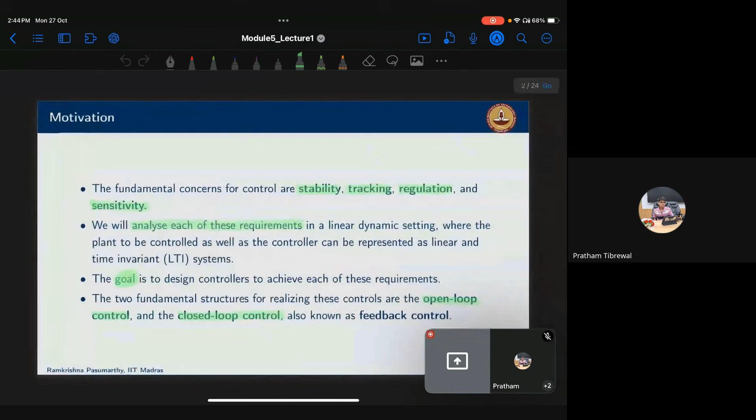Basically, control systems - these are, for any control engineer, the major concepts or major aims: stability, tracking, regulation, and sensitivity. So particularly any control problem will be connected to all these four aspects.

Particularly, the aim of any control problem is to make the system stable, to have the tracking and regulation. So if you see that problem, it could be a regulation problem or a tracking problem at the outset. So what we do in this lecture is first we will see what these four problems are with respect to open loop and closed loop systems, and we'll try to see, by considering an example, what exactly these four things are.

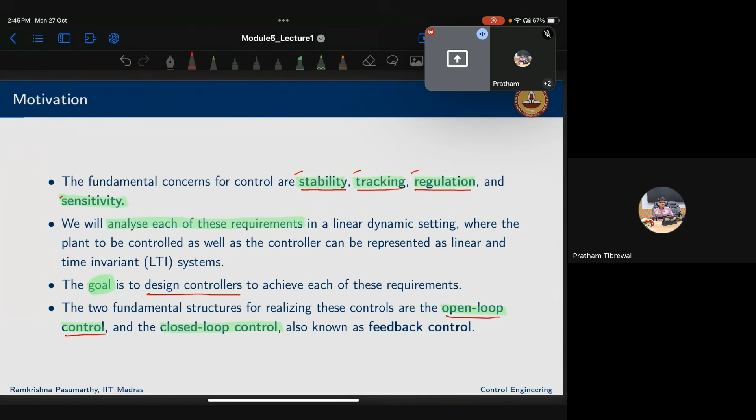Then we will analyze the systems and get into the concepts of designing the controllers to achieve these four tasks. So what we will do is first we will start at the basic level with the open loop system or open loop control. Then we will see what these four concepts are with respect to this open loop control.

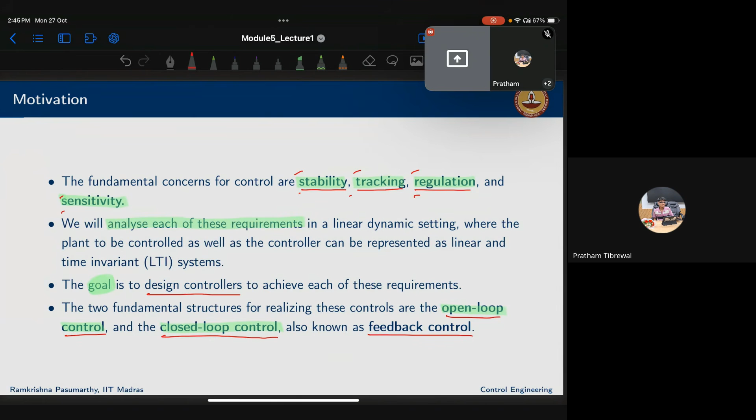Then we'll continue our discussion with the closed loop or feedback control, so that we'll have a simple clarity on what happens when we shift from open loop to closed loop. As you know, open loop means we don't have any feedback.

So open loop will have the reference signal, then actual output, then we have our system here, and this is the controller. There will be no closed signal from output back to the input. So here basically what this controller does is it modifies this reference signal.

So what we do is we give this reference signal to the controller, and the controller modifies the reference signal. Then after that, it will apply that signal to the system or plant - this is also called the plant. So what this controller basically does is it takes the reference input and sometimes it may cancel the unwanted dynamics of the plant and try to replace them with the desirable dynamics.

You can have various examples like washing machines, traffic lights, etc. So the aim of this controller is it takes the reference signal, modifies it, and gives that as the input to the plant.

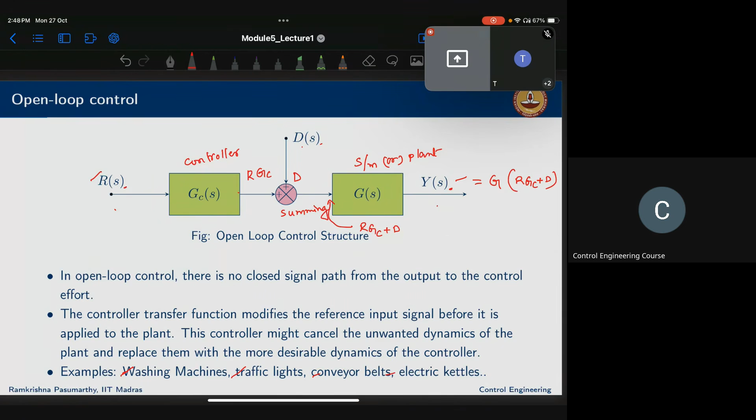That will be multiplied with G, so it will be G multiplied by RGC plus D - that is the open loop output. Once you have that, the signal you wanted to get at output relative to reference input is R. So obviously the error is going to be R minus Y.

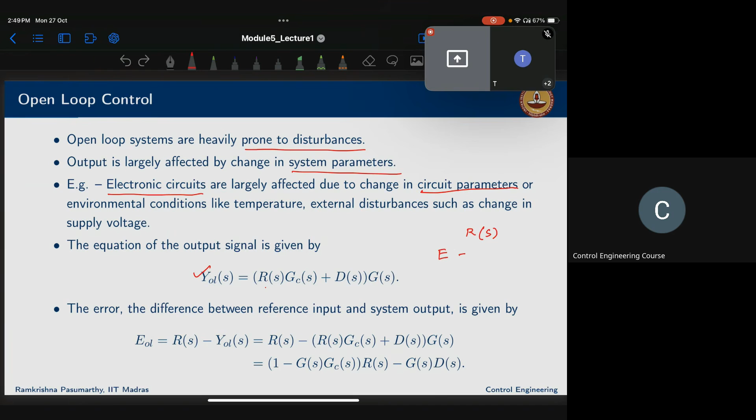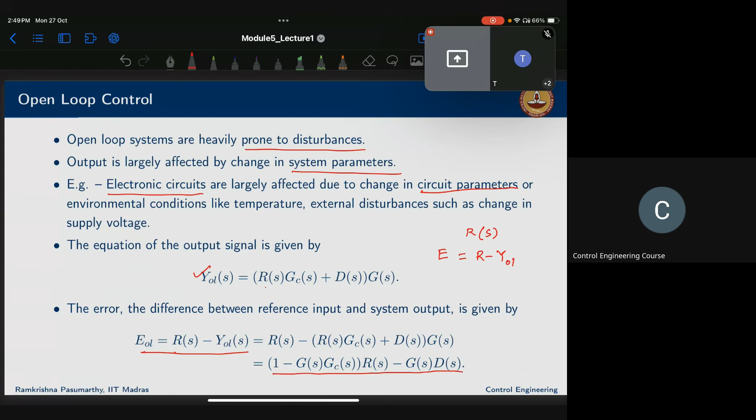So R minus reference minus output of the open loop system. Once you take that, this is the expression of the error for the open loop system with the disturbance. So we are starting with those four concepts.

Let's see this example. This is the example of a thermal control system where we have this system transfer function, the transfer function from heater to the output temperature.

Here our goal is to track the reference input, R of t, which is a ramp with a slope of 30 degrees per second that will go for a duration of 30 seconds, and at steady state we should get a value of 300 degrees Celsius.

Now we wanted to design this open loop control in such a way that we wanted to reach this one, to track this reference signal R of t.

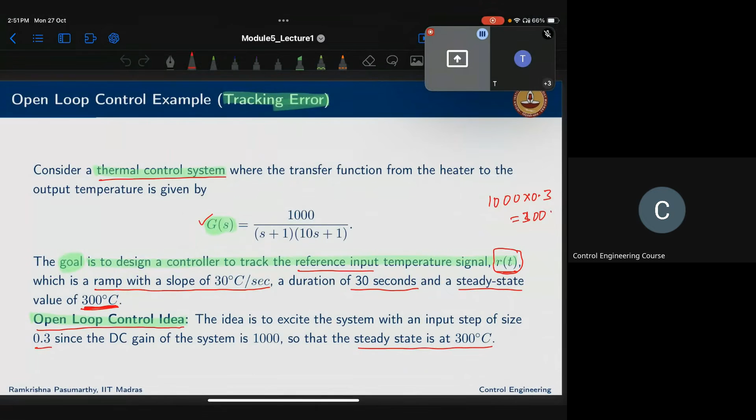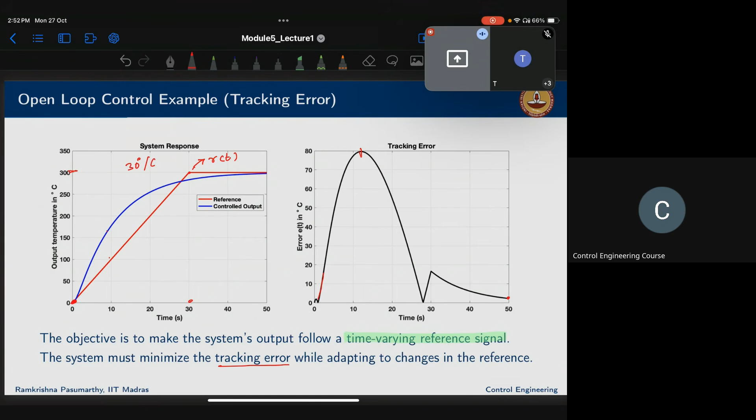So that is the tracking error. Now regulation. Basically regulation is defined as your actual output of the system, y of t, to follow a specific value. It means it will be something like you have t, you have y of t.

So this value, let's say this is some kind of 1. Your y of t has to follow or has to reach this reference value, that is called regulation. Regulation is the ability of the system to maintain a constant output value despite external disturbances.

So the problem of regulation is to keep the error between these two very small, when the reference is at most a constant set point and disturbances are present. You want to minimize that error. When you consider the open loop system, the controller will have no influence on either the disturbances or the noise, because the controller cannot affect these noise or disturbances. So the open loop control system is not suitable for the regulation of this particular thermal system.

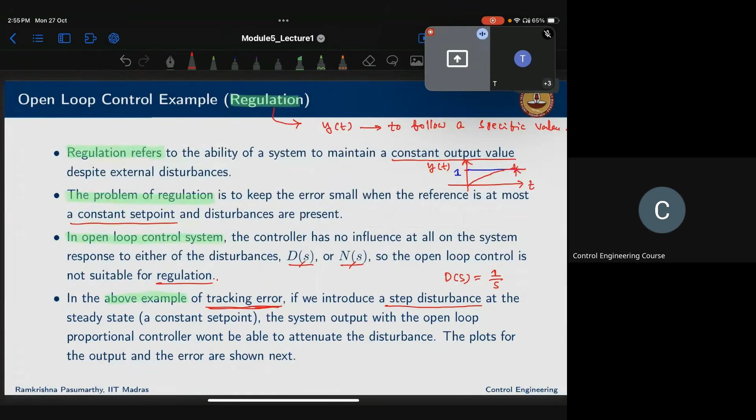If you see this above example of the tracking error, if you consider a disturbance of step in nature, that is D of s equals 1 by s, the system output with the open loop proportional controller won't be able to attenuate that disturbance. So this tracking error would still exist at all points. You cannot make that one go to 0 because the controller will not affect the disturbances. That same thing you can see here, for taking D of s as 1 by s.

When you take D of S as 1 by S, you can see the error with no disturbances, this black one, and with the disturbance of 1 by S, this one. So you're getting the error here 0, here is 50. In the temperature values also here you can see, this is the 300 temperature you wanted to reach when you have no disturbance. That is reaching exactly, but when you have the disturbance, you have this error at the steady state. Basically regulation means to reach this 300 value, whereas this open loop controller will have no control over the disturbance, so we are getting this error at the end.

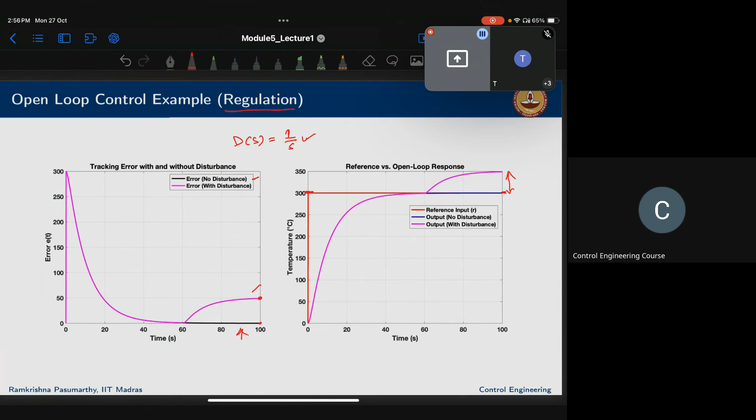So next is, out of all those four, we have seen the tracking error, we have seen the regulation, and next is stability. In the previous modules, week 3 or week 4, we have seen what is called stability. Stability is defined as all poles of the transfer function must lie in the left of the S plane. It means, if you consider this is the real part of S and this is imaginary part of S, if you find the poles of a transfer function, all poles must exist in the left of the S plane. This is LHP, this is RHP.

So how can you define the poles if you consider a transfer function, G of S, where it has the numerator as well as the denominator? If you take the characteristic equation, that is D of S equal to 0, that is denominator equal to 0, and then find the roots of this, these are called poles. These poles must lie in the left of the S plane. If all poles exist on the left side, we say that system is stable. Even if one pole is existing on the right side, we say that system is unstable.

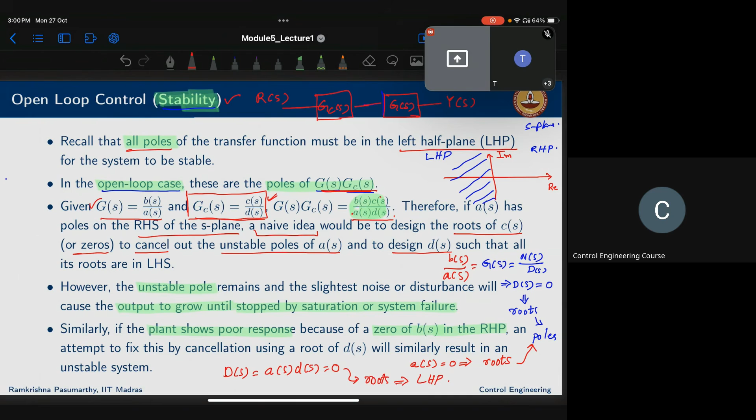But here the issue is that even with pole cancellation, the unstable pole remains, and the slightest noise and disturbance will cause the output to grow until stopped by saturation or system failure. Even if you go for the cancellation of the pole, the unstable pole still would remain, and if there is a slight change in the noise or disturbance, they will make the system response grow without any bounds until it goes to saturation or system failure.

That's the disadvantage. Similarly, if the plant shows a poor response because of the zero of B(s), if any root of B(s) is on the RHP, and you try to fix this B(s) behavior by properly choosing D(s), just like the opposite case of A(s) and C(s), now we are trying to see B(s) and D(s). This will also make the system unstable. Why? Because you're not changing the system behavior, you're just cancelling out the poles and zeros behavior. That makes the system still unstable.

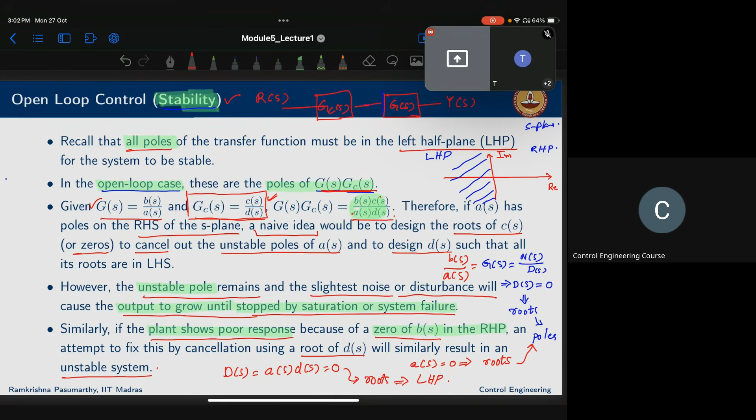So that is about stability. Next, sensitivity. We have seen tracking error, regulation, stability, and now sensitivity. Let us say our plant has a gain of G at a particular frequency, but when it is in actual operation, the gain may perturb. The gain may alter by plus or minus delta G. We can call the fractional change as delta G by capital G. So we already know the open loop gain, because the plant G and controller GC are connected in this way, with Y and R.

So the overall transfer function L is nothing but G multiplied by GC. Now, if you consider the perturbed system, this loop gain changes, so you add this change in L(s). You have the L(s) expression, and you add delta L(s) to get this final expression. From here you can find delta L(s) as delta G(s) GC(s).

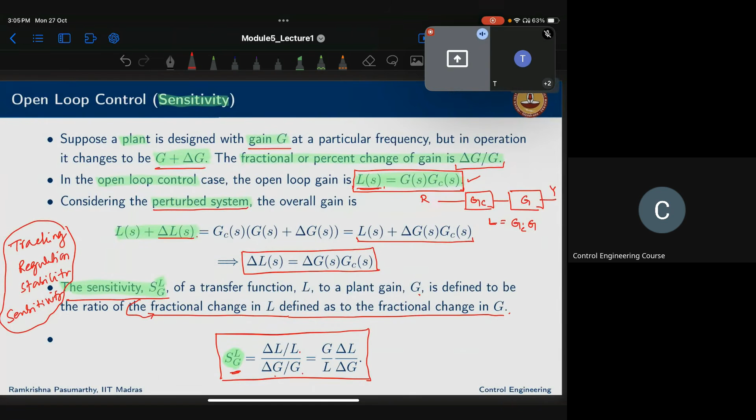Now let us consider this closed loop structure, where for the open loop structure we are adding this feedback path along with noise. Previously we had this structure, and now we are adding the noise as well as this feedback. To the open loop we are adding this feedback by using this sensor block, and also adding noise. Basically, what this feedback control does is use a sensor here which measures the output, and that output will be fed back to this summing point to compare with the reference signal.

Now you could see we have 3 kinds of inputs: R(s), D(s), and N(s). Using the superposition theorem — what does superposition theorem say? It says that when you have multiple input sources, the response of a system is the summation of the responses when all those sources are acting independently.

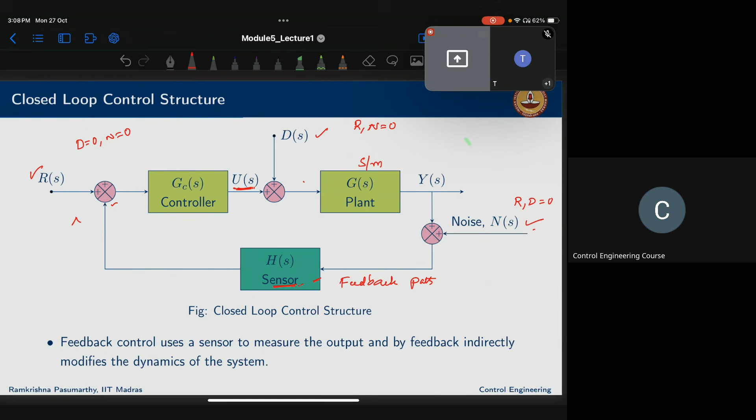Okay, the control input which you apply here, that also in the same way. So the control input due to R of s, control input due to D of s, control input due to N of s. So using the superposition theorem, the total control input is the input due to individual inputs.

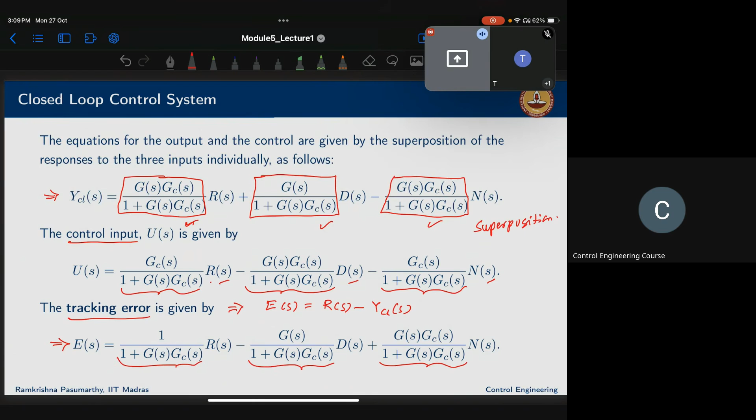Okay, now tracking error is nothing but, again in the same way, E of s is nothing but R of s minus YCL of s. Okay, for the closed loop system, you will get that expression for E of s as tracking error, these expressions multiplied by their inputs. I hope this is clear. So we got this E of s.

Now getting into the same kind of analysis: tracking error, stability, regulation, and sensitivity. So first start with the tracking error. First assume that N of s and D of s are zeros. Then the E of s expression becomes such that the second and third terms go to 0. We have only the first term.

So the tracking error, if you consider delta G of s for this tracking error, that is the change in the open loop transfer function, we can find E of s as delta E of s by including the delta term for this particular term.

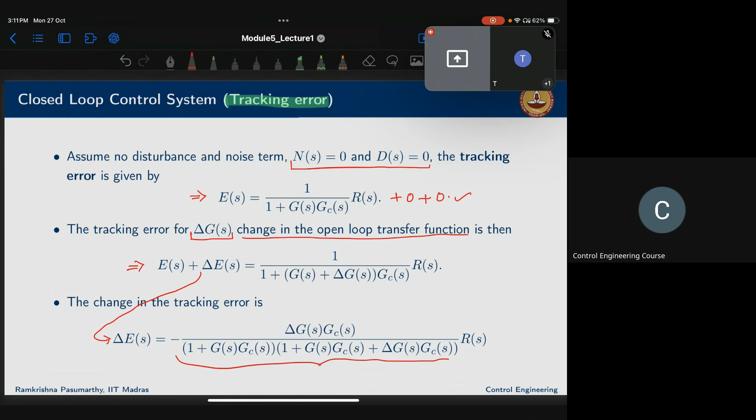Now the change in the tracking error we can find after substitution, this term, by adding into the E of s. Now, if you consider this term and this term, when the first term is much greater than the second term, we can approximate the function in this way. So let us call this G of s as L of s.

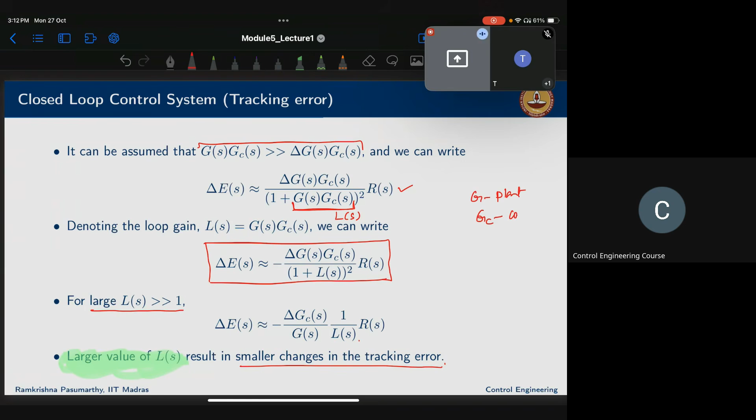Finally you have this change in the tracking error. Suppose if you consider large values for L of s, that will result in smaller changes in tracking error because L of s is in the denominator. For larger values of L of s, there will be a small change in the tracking error. What is L of s? Basically, L of s is the multiplication of G and GC, where G is the plant transfer function and GC is the controller transfer function.

Okay, again consider the same example. The reference input signal R of t is a ramp signal of slope 30 degrees per second for a duration of 30 seconds, 0 to 30 seconds, and a steady state value of 300 degrees Celsius. Now we are dealing with the closed loop system. What is our control strategy? We have to design the controller which minimizes the error between the reference signal and the output, R of t and y of t, and that also minimizes the steady state error.

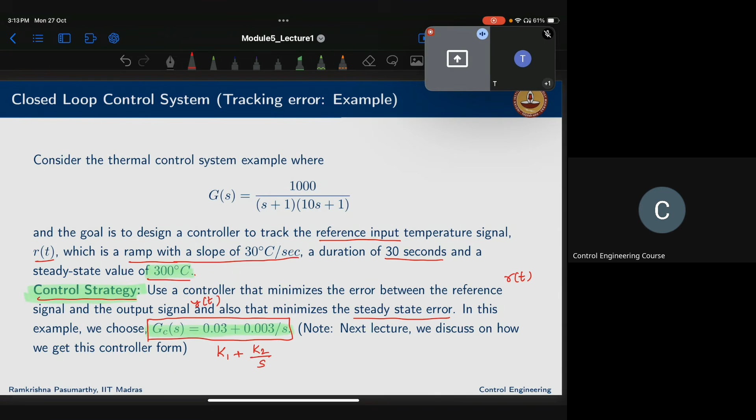Let us say in this example, if we choose this as GC of s, let's see what exactly this expression is. If we choose something like k1 plus k2 by s for GC of s, if you apply and find the y of t expression and find the steady state error, this is the y of t temperature. Now you could see the steady state error is almost 0. Initially there is some error with small deviations, but when it reaches steady state, it is almost 0.

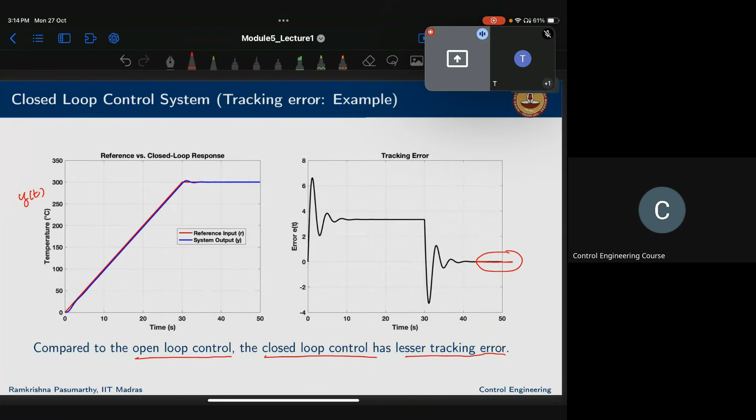This is due to the reason for the inclusion of feedback, whereas in the open loop system this is not 0. It has got some value, it is not equal to 0, whereas in the closed loop system we got lesser tracking error, because the controller has no control over the output in the open loop system, so that is tracking error. Next, sensitivity. Again recall the transfer function for the overall system by including all the 3 inputs.

So the output of the system, closed loop steady state gain. Consider this: you have G, you have GC controller, then a summing point, with R here and Y here, taking the feedback and giving it here. Let us consider this unity feedback system. If you find Y by R, you get GGC by 1 plus GGC. So we call this the closed loop feedback system.

Now let's see the change, the sensitivity. How do we define sensitivity? SLG, that is delta L by L divided by delta G by G. So change in L when there is a change in G, change in L due to delta G, that is given by this expression.

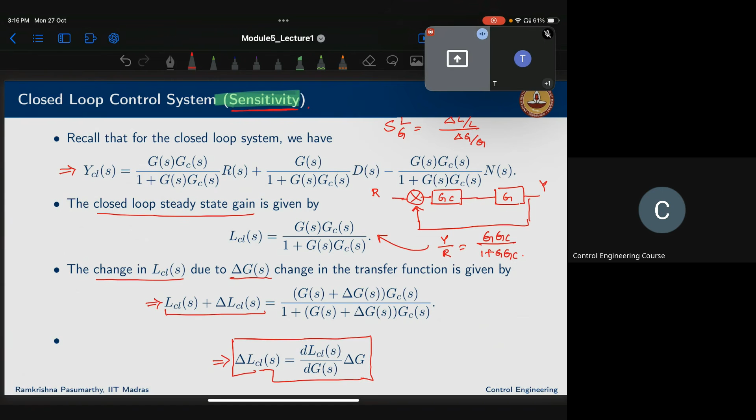Finally we can write delta closed loop steady state gain as this. Here we are trying to find the sensitivity of the system. Sensitivity of L with respect to G, that is nothing but delta L by L divided by delta G by G, same expression. If you substitute all these terms, we get 1 by 1 plus GGC, where G is the plant and GC is the controller.

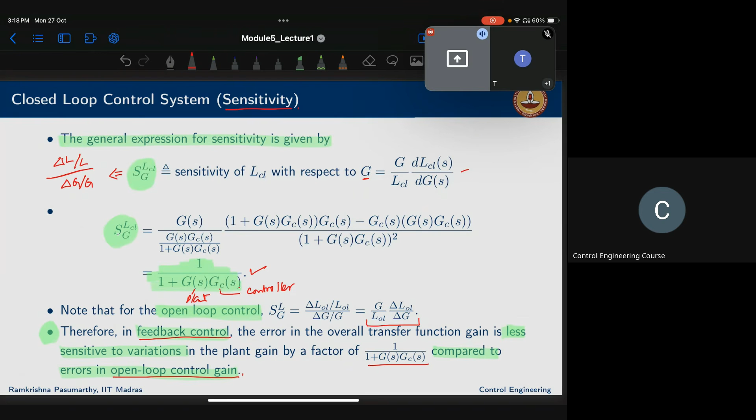G is the plant and GC is the controller. Whereas in case of open loop system, this is what we got, whereas in the closed loop system we have 1 by 1 plus GGC. Therefore, in the feedback or closed loop control, the error in the overall transfer function gain is less sensitive to the variations in the plant gain by this factor, compared to the errors in the open loop gain. So the sensitivity is less compared to the open loop gain. That is about the sensitivity of L with respect to G, where L is the closed loop gain. Next, stability.

In the closed loop system, again, we have G, this is GC, summing point, this is R, this is Y. Let's say here we have feedback as H. If you properly write down the equations and find Y by R, this is plus minus. How can you write down the equations? Let me show you.

Let's say this is the error you get. So what is Y? Let us write one by one. Error E is nothing but R minus H multiplied by Y, since this signal goes here and comes here. Then what is Y? Y is nothing but error multiplied by GC multiplied by G. So you could substitute E here: R minus HY, multiplied by GCG. If you solve this and find Y by R, what do you get?

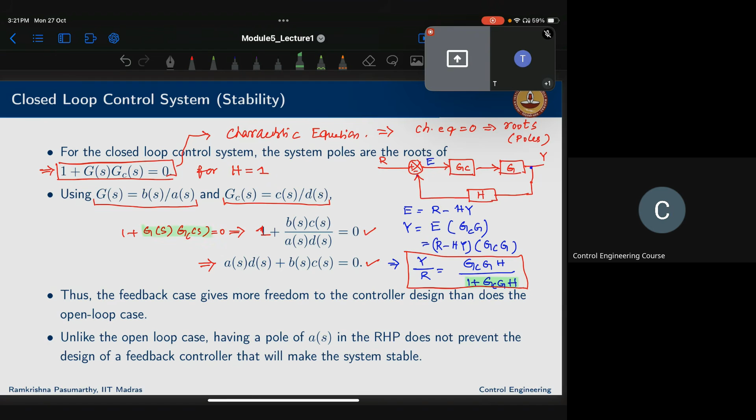Now you see this: this feedback gives more freedom to the controller design than it does in the open loop system, where in the open loop system you have only this term, whereas here you have full flexibility, full freedom for the controller design.

Also, a student asks: unlike that, in Y by R, will H not be there in the numerator? Let me check this. Yes, Y by R is equal to GCGH... just a minute, let me check. Yeah, it should not be there. Thanks. So it will be GC only, 1 plus GCGH, if you solve this equation.

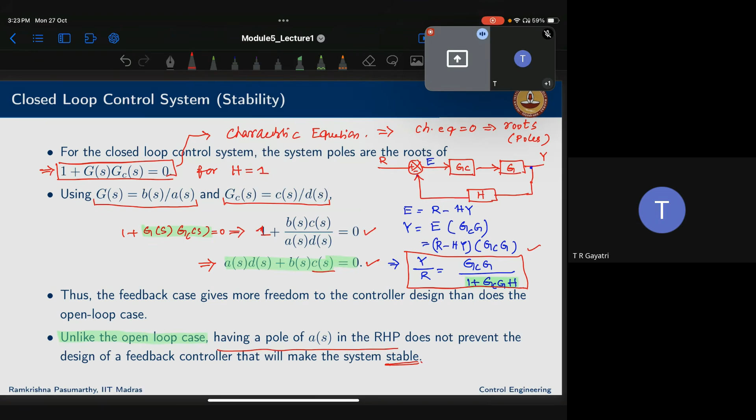Compared to the open loop case, having pole A of S in the RHP, we said that if there is a pole in the RHP, we tried pole cancellation by properly choosing C of S. Here, that is not needed. Instead, having the pole A of S in RHP does not prevent the design of the controller that makes the system stable. So you have the flexibility in choosing these expressions properly. That is the advantage of defining the stability of the closed loop control system.

Let us see this example. Suppose your G of S is 1 by s square minus 1. So you choose B of S as 1, A of S as s plus 1 multiplied by s minus 1. Now let us choose the controller form as this. So the resulting characteristic equation, what is it? Again, 1 plus GcG equal to 0, so you have this equation now.

Let us say gamma is equal to 1, so the characteristic equation can be written like this. If you try finding the roots of this, they are nothing but the poles. You can change the pole locations by properly choosing or changing the value of k here. By properly choosing the value of k, we can keep the poles or locate them wherever we are interested. We can place the pole at our desired locations. That is the advantage of the closed loop system.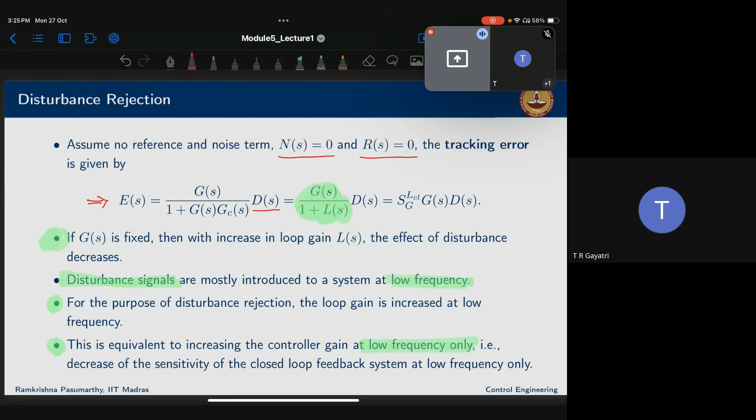As I said, take N of S, noise, and the reference input as 0. Then our tracking error consists only of the disturbance. L of S is nothing but GGc. This expression is the sensitivity times G of S, and the input is D of S. If we fix this G of S, then by increasing the loop gain, that is L of S, you can reduce the effect of the disturbance. If you keep increasing L of S, you can reduce it further. So that is one advantage. Also, the disturbance signal mostly gets introduced at the lower frequencies, so for disturbance rejection you could increase L of S at lower frequencies only, so that the disturbance can be decreased.

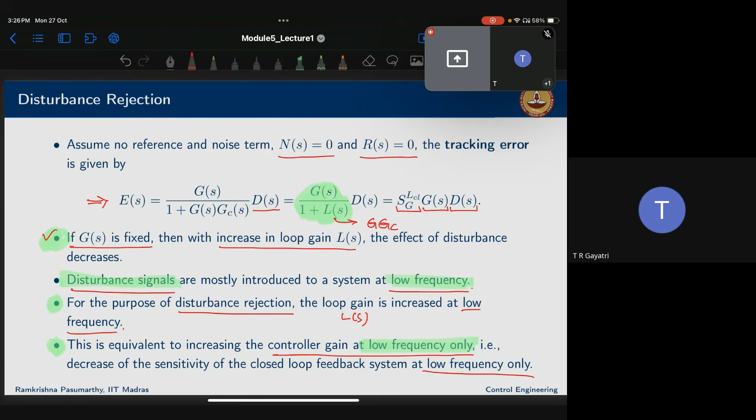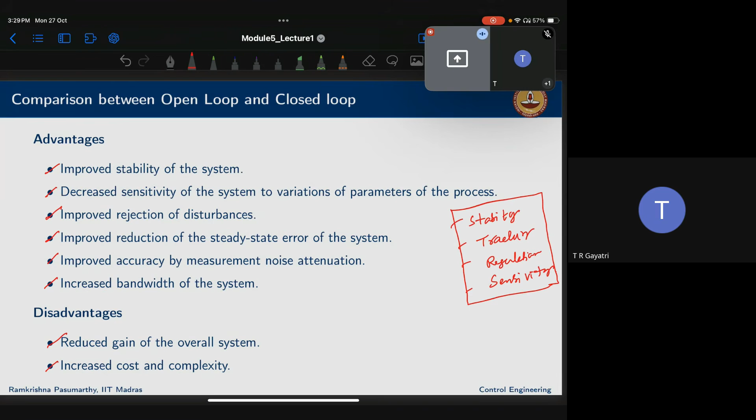So what we saw in this lecture is the open loop controller design, closed loop controller, and comparison, and we saw the 5 topics: tracking error, stability, sensitivity, disturbance rejection, and noise attenuation. So next, since closed loop controller has many advantages, we'll see the design of different closed loop controllers.

Are there any queries here? Any quick queries? Not right now, sir, there's actually a lot of information.

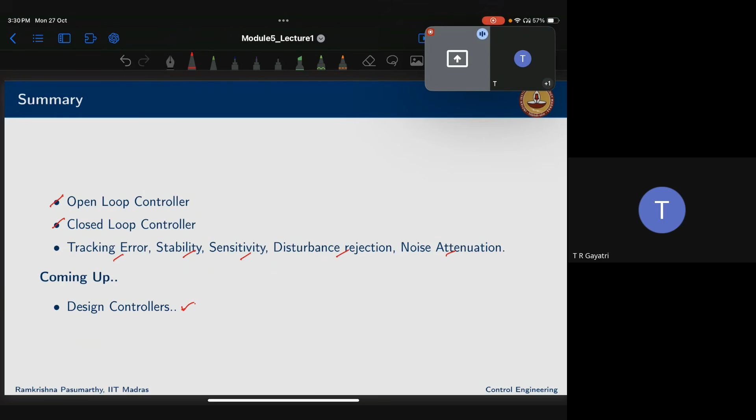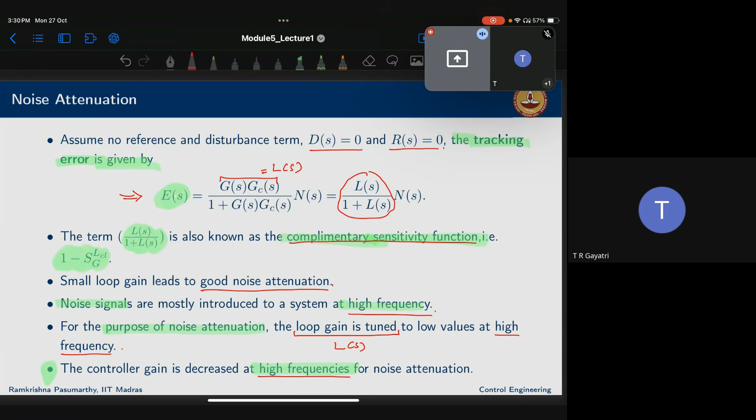Yeah, it's a lot of information, but what you need to do is first see the overall picture and start asking the doubts. Let me show you once again.

These are the 4 major things: stability, tracking, regulation, sensitivity. Assume these are the 4 tasks. Any control system problem will have either 1 or 2 of these 4 tasks. Try to do the calculations with respect to the open loop, try to do the calculations with respect to the closed loop, and start comparing them, so that you'll have a clear idea why we have to go for the closed loop control system.

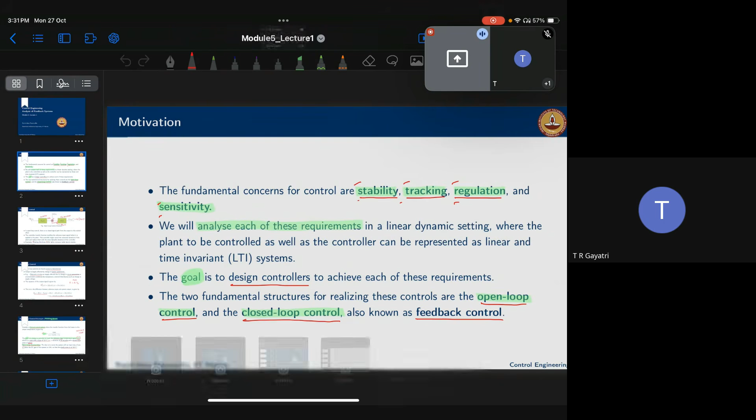This is the practical aspect. So now the conclusion here is the closed loop systems will have many advantages over the open loop system. So we are getting into the controller design part of the closed loop system setting.

Sir, one doubt. Yeah. So in practice, we have some open loop systems also, no sir, in washing machine kind of thing. They are all open loop. Because in open loop system, basically we give the signal, we will not have any control over the output.

Yes, sir. So if disturbance is added, suppose we switch on the device, if disturbance comes in the middle, that will be reflected, its effect will be reflected in the output. We cannot reject it.

So let's say in washing machine, when the machine is running, we open the door. That's counted as a disturbance, right? Yes, yes, yes. So how does the system deal with that? It will immediately stop, it will show its effect by going into the saturation of the system.

It depends upon what you are doing. If you open the door, it may affect you maybe in a great negative way. Some disturbances are very small, whereas some disturbances are very high. No, that depends, let's say in top load washing machine, it doesn't cause any damage. Yeah, so that's what I am saying, that depends what you are doing. And based on the system also.

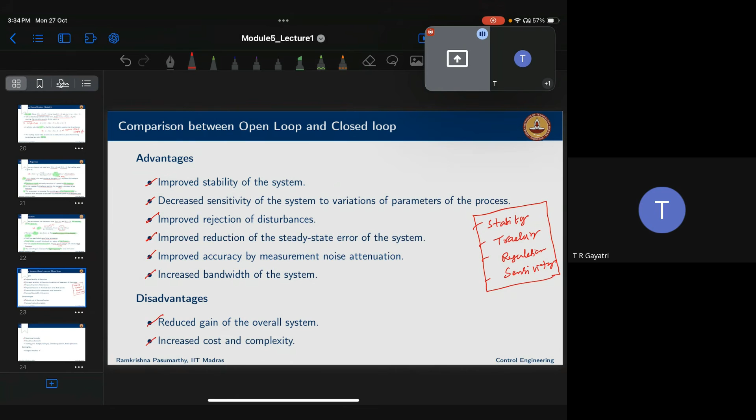So whereas once you get into the closed loop system, they have the capability of rejecting these disturbances and attenuating the noise also. That's why I said closed loop systems are less sensitive, but open loop systems are very sensitive. Okay, thank you.

So next we are looking into the controller design.

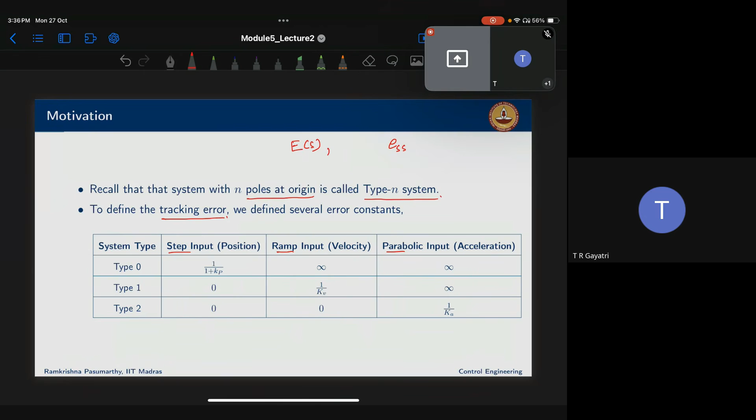So we have defined the steady state error for when the type is 0, type is 1, and type is 2. If you observe, for type 0 systems, only step input will produce some steady state error, that is 1 by 1 plus Kp, where Kp is nothing but limit s tending to 0 of g of s.

For type 0, we cannot calculate the steady state error for ramp and parabolic. Next, for type 1 system, the steady state error is 1 by Kv, where Kv is limit s tending to 0, s times g of s. Similarly, we have Ka, limit s tending to 0, s square g of s. These are the formulas we have.

So for type 1 system, only ramp input will produce some steady state error, and step input will produce zero steady state error. We cannot calculate the steady state error for the parabolic input. Similarly, for the type 2 system, we can only calculate the steady state error for parabolic input, and for the other two inputs, the steady state error is 0. This we have already seen in the previous module.

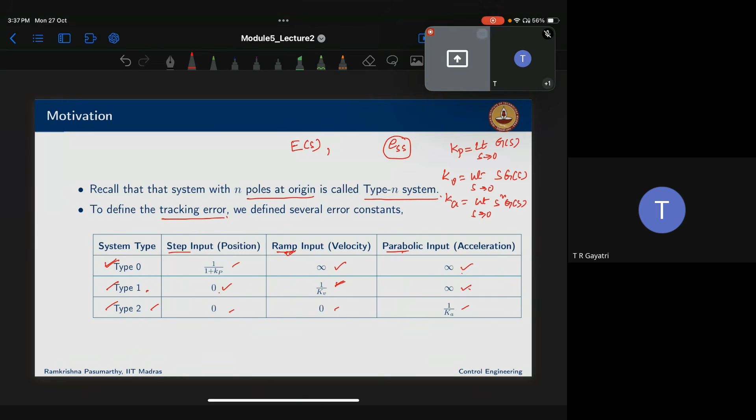Okay, so now let's see the controller part. What we are going to see here is the PID, proportional integral derivative controller. So in place of controller, we define this proportional integral derivative block, which is a controller that continuously calculates the error between R of t and y of t.

R of t and y of t. So it will try to adjust the control signal to minimize the error. By adjusting properly these proportional, integral, derivative terms, we try to minimize the error. That's what we are going to see. First, we see individually how the proportional term, integral term, and derivative term act on the system, and how changing their parameters helps minimize this error.

Then finally, we will try to club all those three, which has this form, where Kp, Ki, Kd are the proportional, integral, and derivative terms. Let us start with the first one, the proportional term.

Basically what we are going to do here is take the same block diagram again. So this is G, this is Y. Here in place of controller we have GC, and GC is nothing but these values. And this is R.

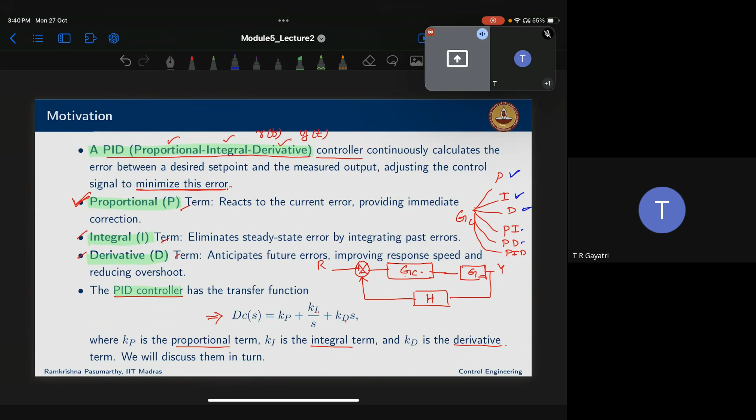So first, let's see the effect of a zero and a pole. Let us consider a transfer function G1 of s, which has two complex poles and one zero. We can write this by separating the terms into a first term and a second term.

So first term and second term.

Okay, you can see this. Here the zero is located from here. You can see the zero is located at s equal to minus alpha zeta omega n, and also it has this DC gain of 1.

Now if you see the step response, that means this would be y1 of s by r1 of s. Step response means take r1 of s equal to 1 by s and find y1 of s. So r1 of s is 1 by s. So now you have g of s plus s by alpha zeta omega n g of s by s. Okay, you have this expression.

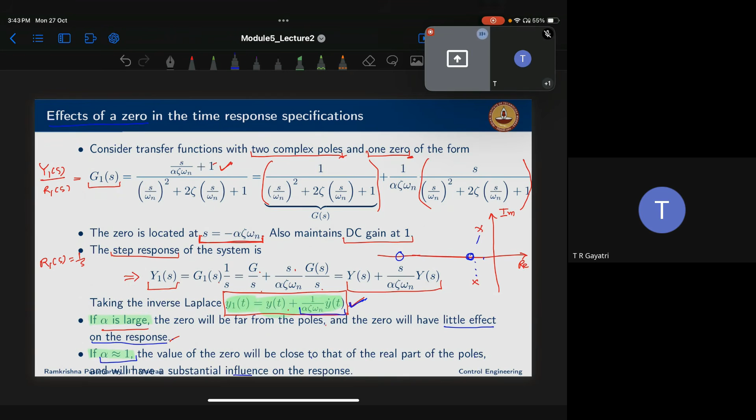So what this expression says is it will have little effect on the system because of this term. If you take alpha equal to 1, the value of the zero will be very close to the real part of the poles. If you take alpha here, that is very near to these poles, it will influence the response.

You could see here when alpha is equal to 100, this is not affecting much. It is almost equal to the other output, so the deviation is very less. When alpha is very close to the poles and zeros, the effect is different.

So these are the poles you have. This is with respect to alpha 0.5, and this is alpha is 100. So alpha very close to 1 will have overshoot very high.

So we know what overshoot means. Overshoot is from the reference, so this magnitude, overshoot is very high. Is this clear? So that is for when zeta is equal to 0.5. When zeta is equal to 0.7, you'll have the similar effect.

So that is the effect of the zero in the time domain specifications. What happened here? The overshoot is getting increased when alpha is equal to 0.5, that is very close to the poles. When alpha is equal to 100, it is not showing much effect in both these cases.

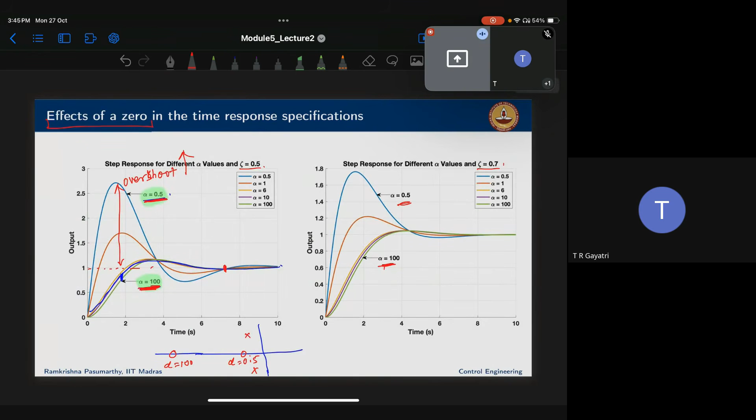So what is happening here? It is increasing the overshoot. There is not much change in the settling time. You can see all the curves are reaching the settling time at almost the same time. So the response is faster as alpha is tending to infinity.

So the contribution of the zero to the system response decreases and we recover the original signal behavior. As alpha increases, we get the original system behavior. That is the effect of the zero.

Similarly, we'll show the effect of adding an extra pole, and how it affects the system specifications. Using the same g of s expression, we are adding this - an extra pole at s equal to minus alpha zeta omega n. Let's see when we add this.

So again, when alpha is increasing, what is happening here? The contribution of the pole to the system response reduces and we can recover the original behavior. So this behavior is nothing but this behavior.

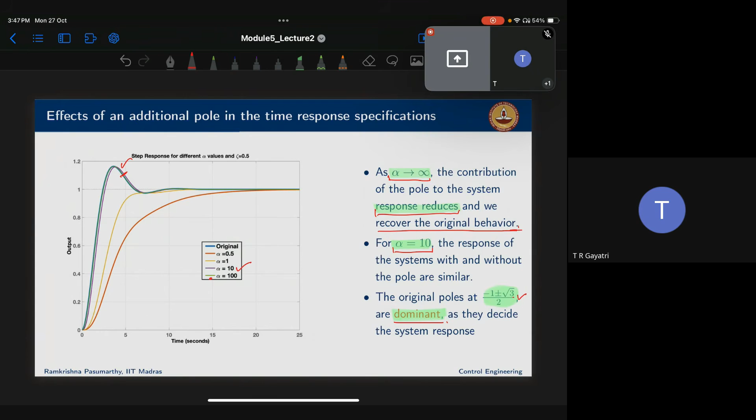So basically the original poles are at -1 plus or minus root 3 by 2, so they are dominant, so they decide the system behavior. So basically what happened when you add a pole - when alpha, the pole value, is very far or increasing, the contribution of the pole to the system response reduces and we recover the original behavior. That is the characteristic when we add an additional pole.

Is this clear? So this is about adding a pole and adding a zero. Any doubt here?

No, sir. Yeah, so now we are getting into the basic controller. As I said, what we are doing is, this is your controller. Inside this, we are keeping this KP, where KP is nothing but proportional gain - proportional controller gain. Okay, this is the structure.

So in this structure, our main aim is to see what is y of t, and to check what happened to the steady state error.

Okay, so that means to check E of t. What is E of t? R of t minus y of t. Okay, R of t minus y of t. Once we have y of t, we need to see steady state error.

What is steady state error? Limit t tending to infinity of E of t. That is the aim in every controller design, to check this one. Our ultimate aim is to match with the reference input, match our y of s to the r of s. So for that, first we'll find y of t and find the error.

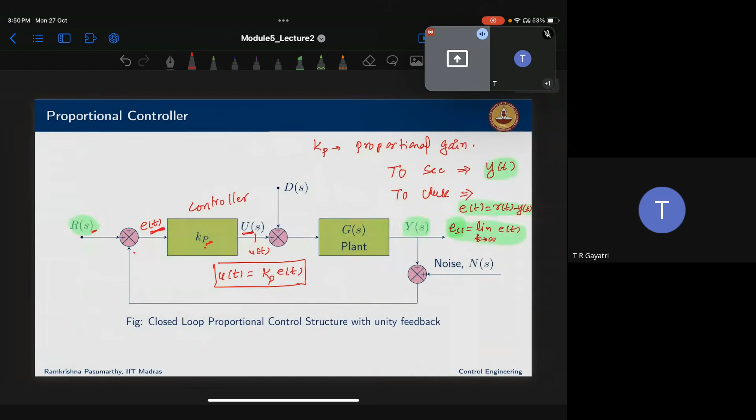So then the controller transfer function. What is the controller output? Output is U of s, input is E of s. What is the controller transfer function? That is kp. Controller transfer function gc of s, here is kp.

Okay, so let us start with the first order system now, with a unit step response, unit step reference. That means R of t would be 1, R of s would be 1 by s. So find E of s. So then our ESS...

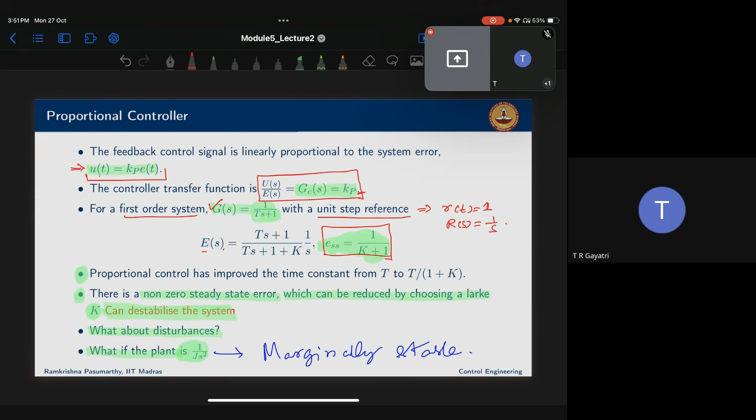is nothing but steady state error. Okay, so steady state error, how does it look like? So we are supposed to... this is t, this is y of t. R of t is what? R of t is 1. This is what we wanted to meet. But what is the value here we got?

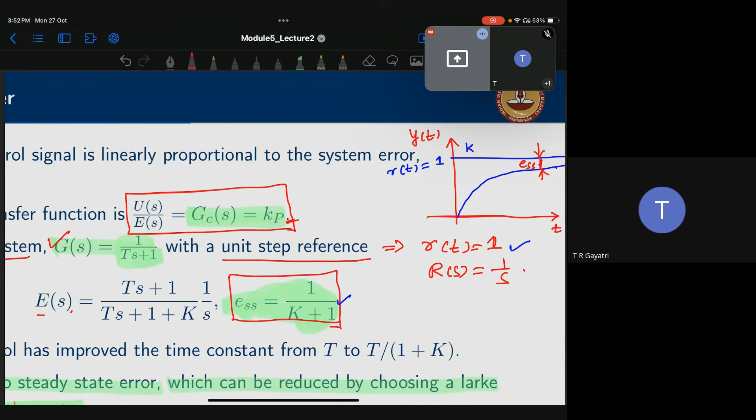Steady state error we have is 1 by k plus 1. It means the y of t expression would be like this. So if this is k, so this will be like k, 1 by k plus 1. So always there will be an error, ESS. This error. Clear? So this is the steady state error we are getting. Is this clear? Any doubt?

No sir. So what basically we are doing is we are substituting kp here. So this is G, the first order system. So we find this E of S expression. We find this E of S expression.

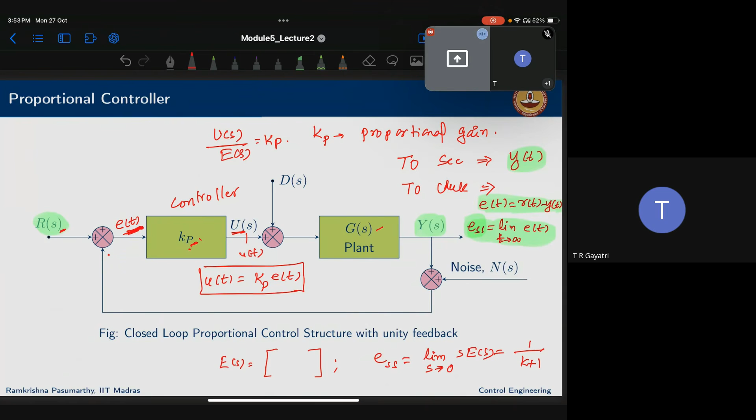Once we have this E of S expression, we are finding ESS. That is nothing but the final value theorem of Laplace transforms: S tending to 0, S E of S, correct? So that thing we are getting is 1 by k plus 1. Basically we should get that as 0. But we are getting what? 1 by k plus 1.

It means that a non-zero steady state error we are getting. It means that y of t is not reaching 1. So there is a deviation. Okay, so now you could see.

So it improved the time constant. Basically, the time constant here is t. So the time constant goes from t to t by 1 plus k because of this term. But it is giving a non-zero steady state error, this error. So how can we reduce that?

The steady state error, how can you make that steady state error go to 0? If you choose a large k value, you can make ESS go to 0, correct? So you can reduce that steady state error by choosing a larger k. But if you choose a larger k, what would happen?

If you choose a very high value of k, it can destabilize the system. It can destabilize the system. That is the problem. So we cannot choose a larger k value for the system.

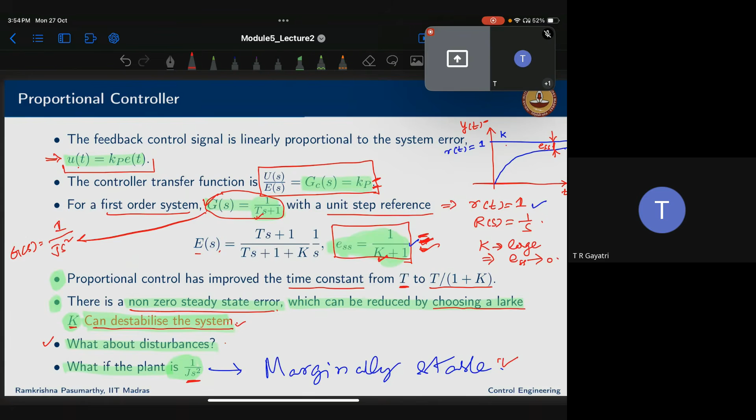So here we can also see the same analysis by adding the disturbance term also. What if your plant is like this instead of g of s here? Take your plant as 1 by j s square. If you take that, your calculations will lead to the system being marginally stable. Okay, so that is for the first order system.

Let us see for the second order system. So this is the plant transfer function we have, a by s square plus a1s plus a2. Similarly, once you find the closed loop transfer function, gcl of s equal to g by 1 plus gh. Sorry, so GGC by 1 plus GGCH. So what is the characteristic equation? Characteristic equation is 1 plus GGCH equal to 0. So this characteristic equation, if you do the calculations, you will get like this.

After substituting G of S, this is the final equation. Here we have coefficient 1, coefficient a1, and this is the constant term. By properly choosing Kp, we can control this constant term, which determines the natural frequency, but cannot control the damping term a1, as it is independent of Kp. It will not affect much of the system behavior. So damping will not change. Only thing it can change is the constant term.

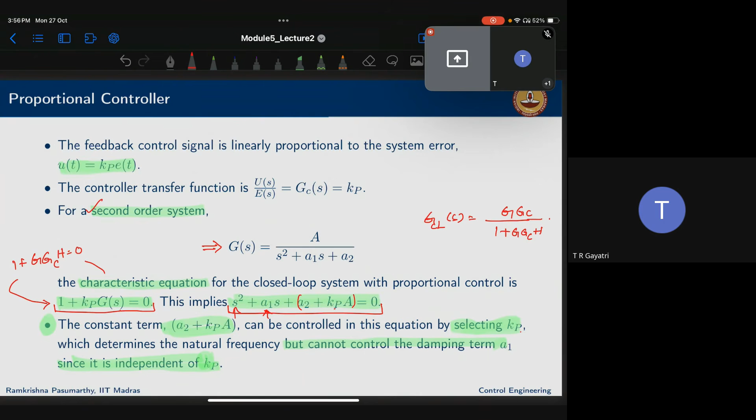So you can see here, if you make Kp very high, we could get a small steady state error. So the damping may be much too low for a satisfactory transient response with proportional control alone. So if you choose your Kp very high, you can make your system close to the reference value. That is about the proportional controller.

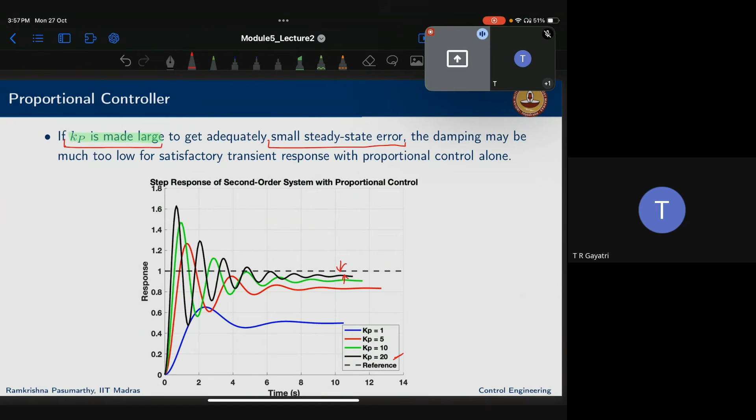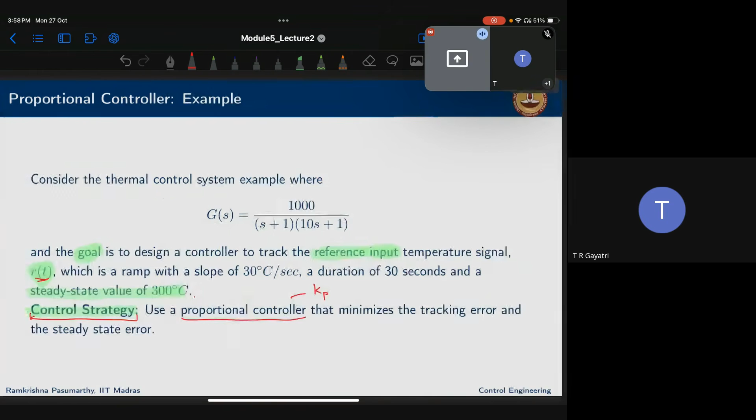We are starting with this G of S. Controller GC of S is Kp. Closed loop transfer function T of S, which is nothing but G times GC by 1 plus G times GC. Let us take unity feedback equal to 1. If we substitute, you will get this one because GC is Kp times G of S. Now R of T is defined in this way: from 0 to 30, it is 30t; from 30 onwards, it is 300.

Suppose you see this system, T of S, it is a type 0 system. It means you will have S power 0 here by S power 0. And the signal is a ramp signal. We have seen the starting of these slides: ramp signal, type 0 - what is the steady state error? It is infinity, correct? We cannot find the steady state error. That means it cannot track.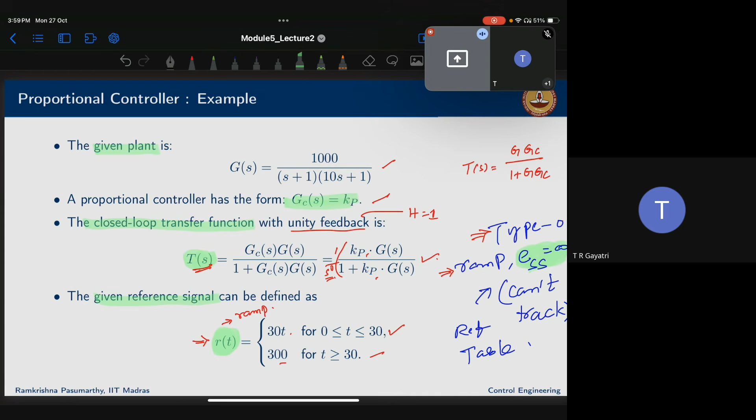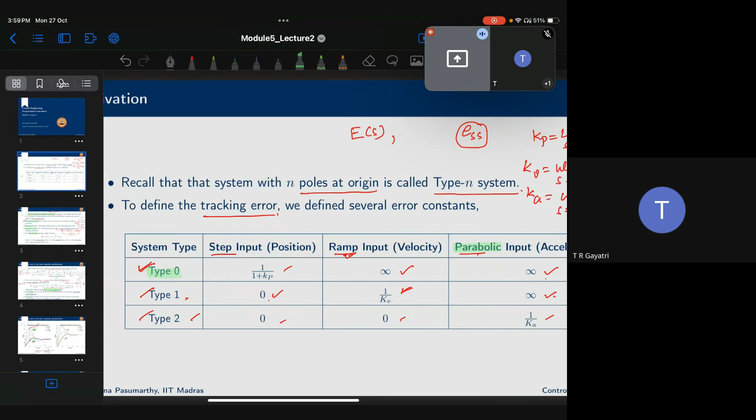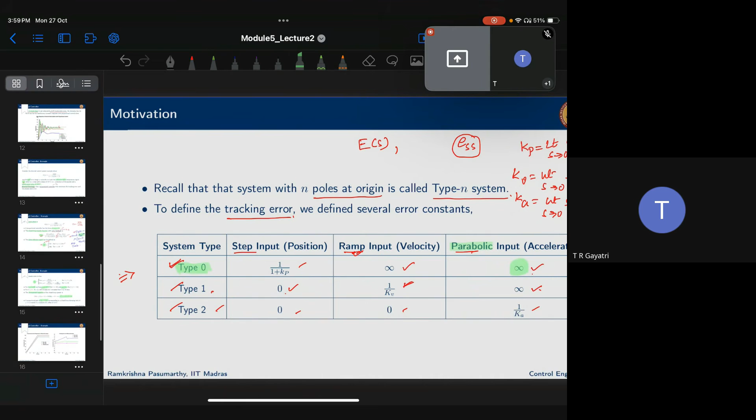So you can see, starting we have a ramp signal, type 0. So the steady state error is infinity. It cannot track that particular input.

So you can see, steady state error - we are finding this after substitution. So for both cases, between 0 to 30 and 30 onwards, here steady state error is infinity, whereas here steady state error is this, for the ramp part - this is ramp part, and this one is step. Suppose if you choose Kp is equal to 0.03, we'll have a steady state error of 10 degrees Celsius for T greater than or equal to 30. And if you substitute here, for between 0 to 30, the steady state error is infinity. So between 0 to 30, E of T will increase as T is increasing from 0 to 30 seconds.

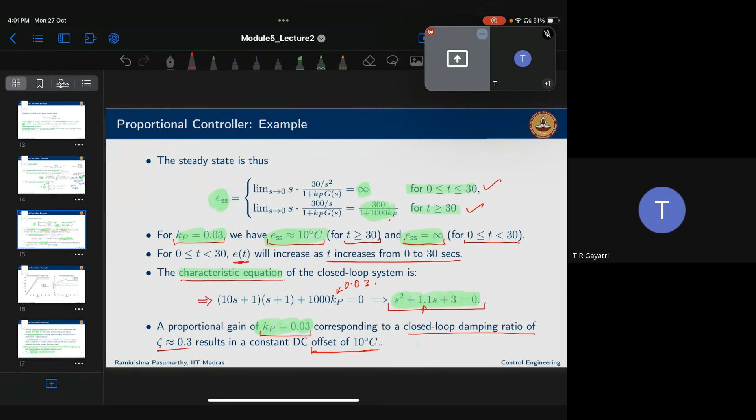For the same system, if you consider the characteristic equation, after substituting Kp equal to 0.03, you'll have S square plus 1.1 S plus 3 equal to 0. So a proportional gain of Kp equal to 0.03, Kp being a constant, corresponds to a closed loop damping ratio of zeta 0.3, which results in a constant DC offset of 10 degrees Celsius. It means that we are getting an offset. Offset is nothing but your steady state error.

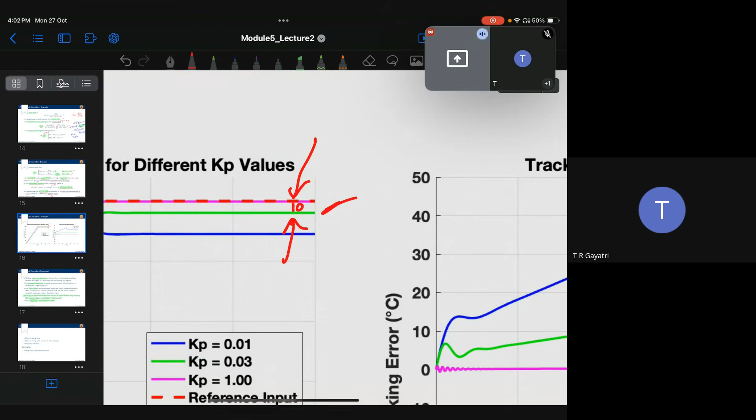Here you can see this - Kp is the green one. So we are supposed to reach 300. This difference is 10. This difference is 10. You can see here the steady state error is almost reaching this 10.

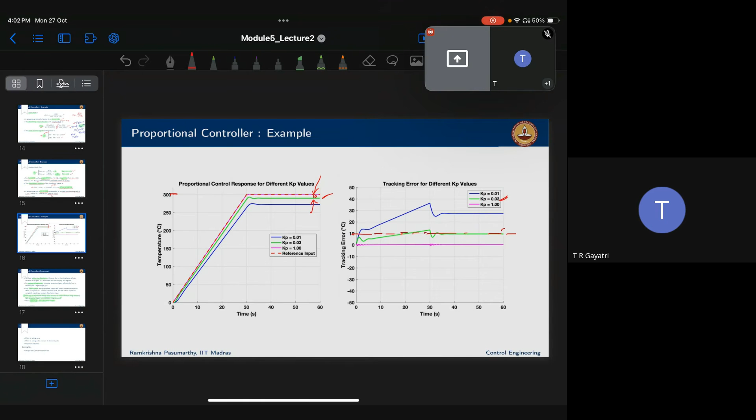Okay, so we are getting that much offset. So that is the main part of the proportional controller.

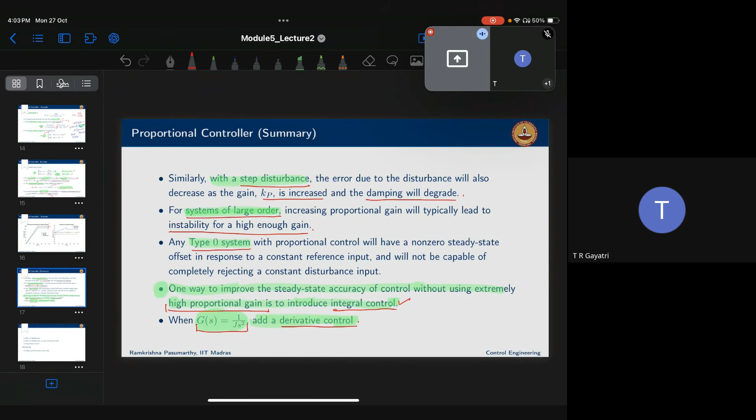So when you have systems of this nature, adding a derivative controller will give an advantage. So here what we see is, in these slides, we have seen what happened if we add zeros, what happened if we add extra poles, and particularly the concept of the dominant poles. So adding a proportional gain term in place of the controller.

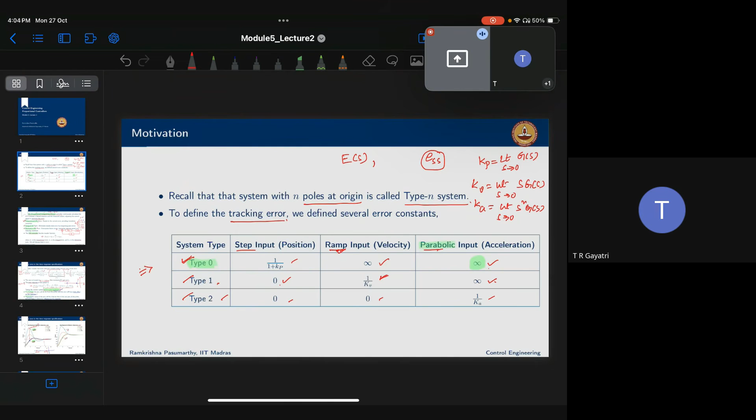Any quick queries in this? What we will do is we'll stop here. If you have any queries, please ask me, because you should get the controller, proportional controller basic concept.

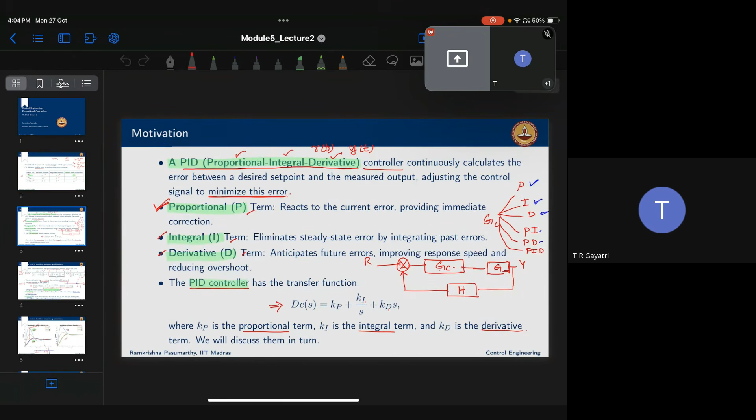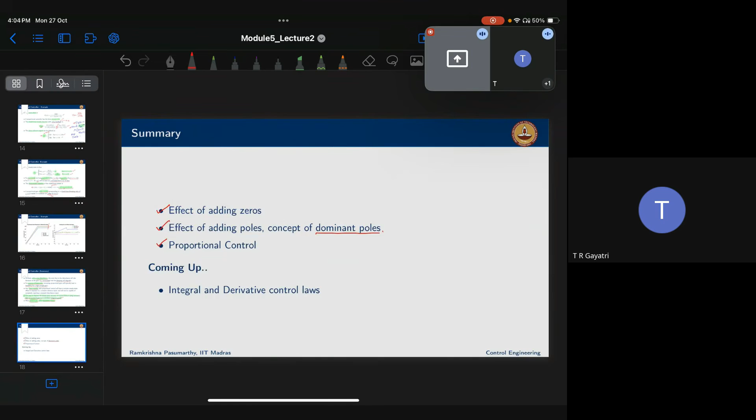No, sir. Yeah, actually, after yesterday's quiz, I haven't got time to. Okay, you have not seen the videos. So the only thing is that what you need to do is, let me explain you once again.

You know the closed loop control system, correct? So you have this plant transfer function. I'm not considering disturbance here. So you have this controller transfer function. Then you have a summing point here, plus minus. Then you have a reference R of S here. Then you have Y of S here. So then you have the feedback here.

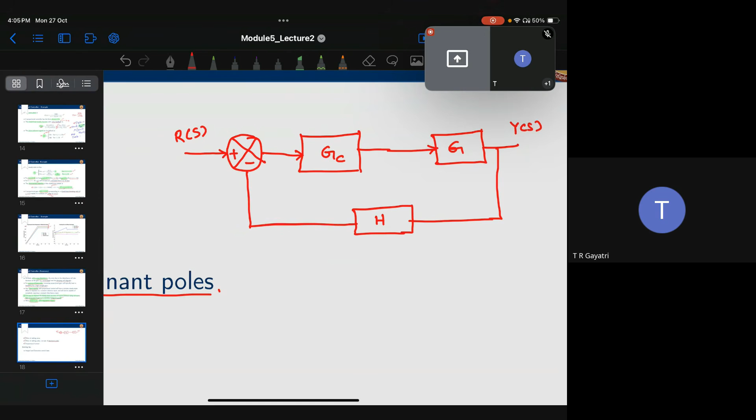So in this PID controller setting, what we do is, we'll have the three things. Proportional controller: this GC we will replace with KP. In the integral controller, we will replace GC with KI by S. In the derivative controller, we replace the GC with KD multiplied by S. So GC is given already for any problem, the plant transfer function. Sorry, G is given, GC is any of these.

Okay, then what you need to do is, you already know Y of S by R of S expression, that is GGC by 1 plus GGCH, correct? So R of S is also known. It means that is the reference input which you wanted to reach. So then you find your Y of S expression. Once you have this Y of S expression, apply the inverse Laplace and find Y of t expression.

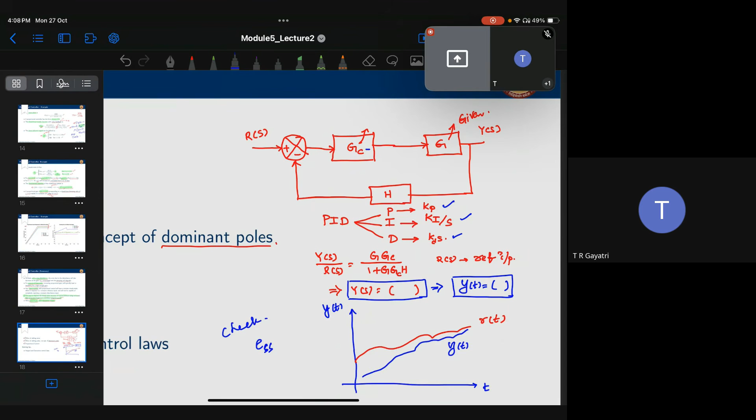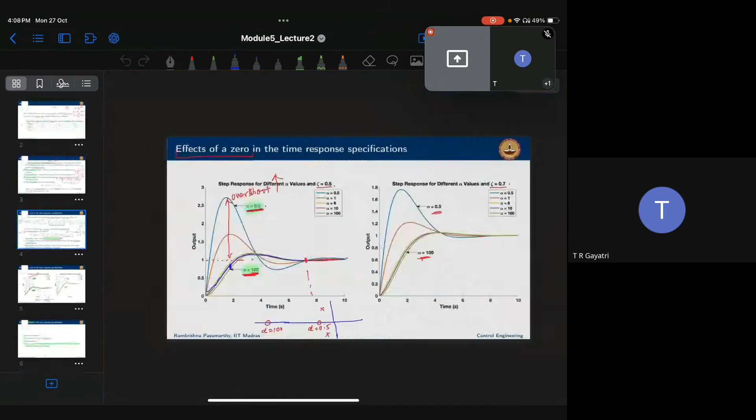Actually, it has to be 1, but we are supposed to reach this 1, or k. We are getting 1 by k plus 1. It means both are not the same. So that means there is a non-zero steady state error, but it is taking our output very close to that. So it means that proportional controller will reduce the steady state error, but it will not make that steady state error to 0. That is the conclusion.

Is this clear? Yes, sir. Yeah. Any other queries?